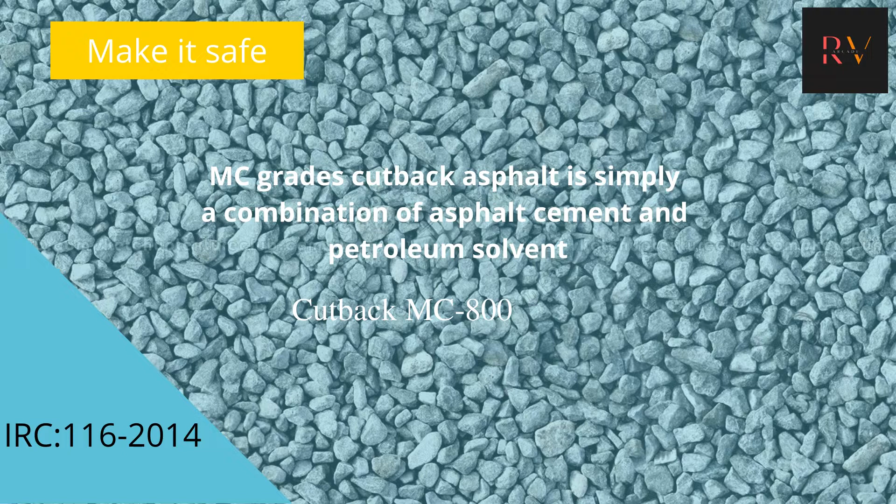MC grade cutback asphalt is simply a combination of asphalt cement and petroleum solvent. The material shall consist of plant mixed ready-made pothole patching bituminous mixture composed of mineral aggregate coated with bituminous material. The material shall be capable of being stocked for at least 6 months without stripping and shall be workable at all times. Unless specified otherwise, the mix shall be supplied in 50 kg plastic lined sturdy bags.

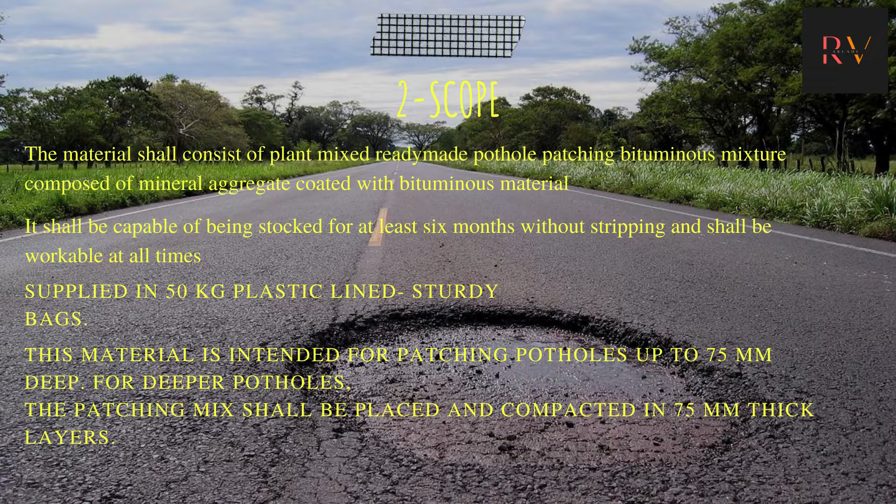This material is intended for patching potholes up to 75 mm deep. For deeper potholes, patching mix shall be placed and compacted in 75 mm thick layers. Details on the preparation of potholes, placing and compacting the mix in potholes are also given to ensure its effective use. The ready-made cold patching mix is suitable for patching potholes only and shall not be used for patching long stretches of damaged road surfaces.

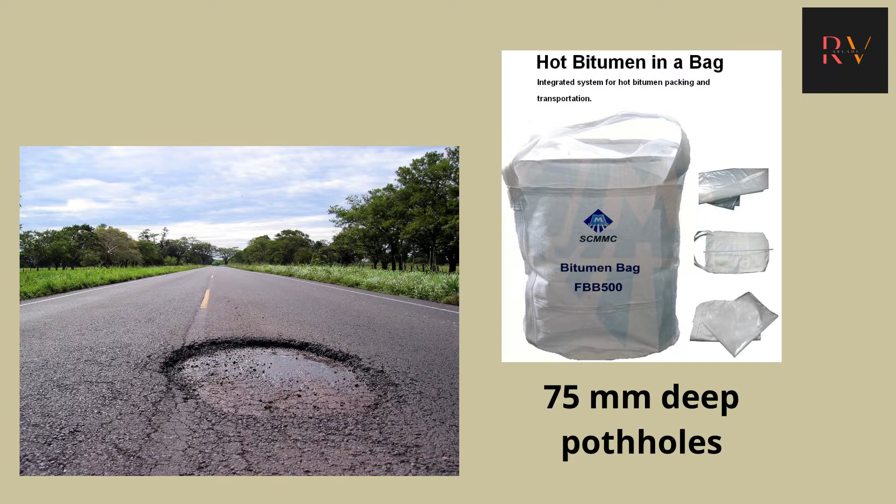As you can see, the ready mix bitumen is supplied in these sort of bags. The materials which we are going to use are bitumen, coarse aggregate, fine aggregate and composition mixture.

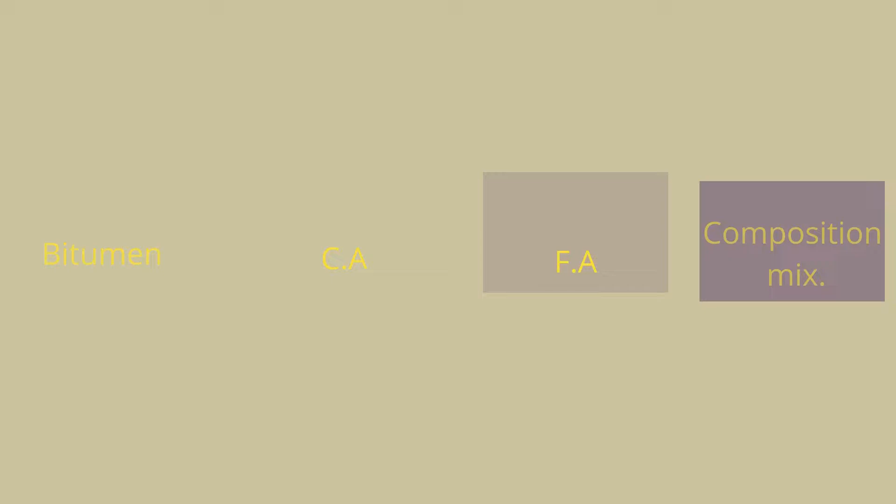Coming to the bitumen, medium curing cutback bitumen MC800 conforming to Indian standard specification IS 2171. Specifications for cutback bitumen shall be used in preparing the patching mix and shall be supplied by a certified manufacturer of this product. For proper mixing, the bitumen shall be heated as specified in section 4, which we're going to deal with in a while. MC cutback bitumen shall be treated with the proper type and amount of an anti-stripping agent.

This anti-stripping agent is approved by the bitumen supplier, so that when combined with the proposed job aggregate, the resulting mix shall pass the wet coating test, static immersion test, and water resistance test as given in Appendix 1. Moreover, the anti-stripping agent shall conform to IS 14982.

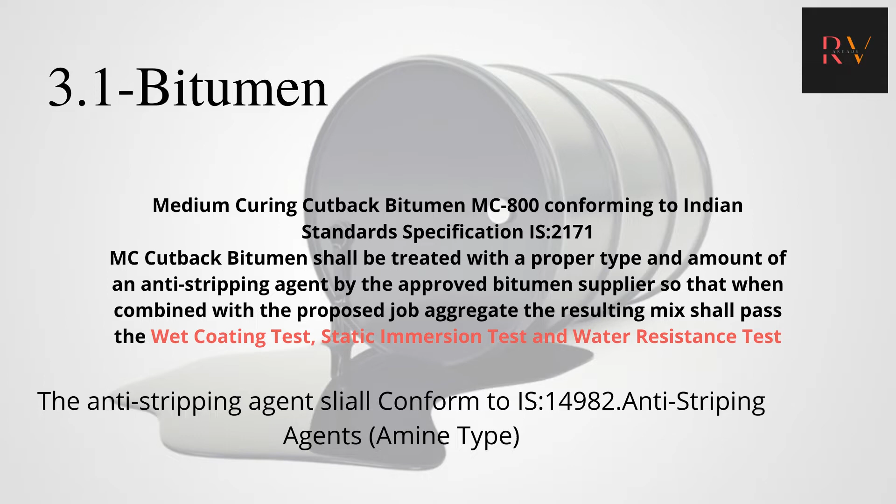Now on the contractor's part, the contractor shall furnish the sample of job aggregate each year to the bitumen supplier for these coating and stripping tests and obtain a certificate that the bitumen material has been treated to suit the job aggregate. This yearly certificate must be on file and shall be available at the asphalt mix plant when required by the engineer.

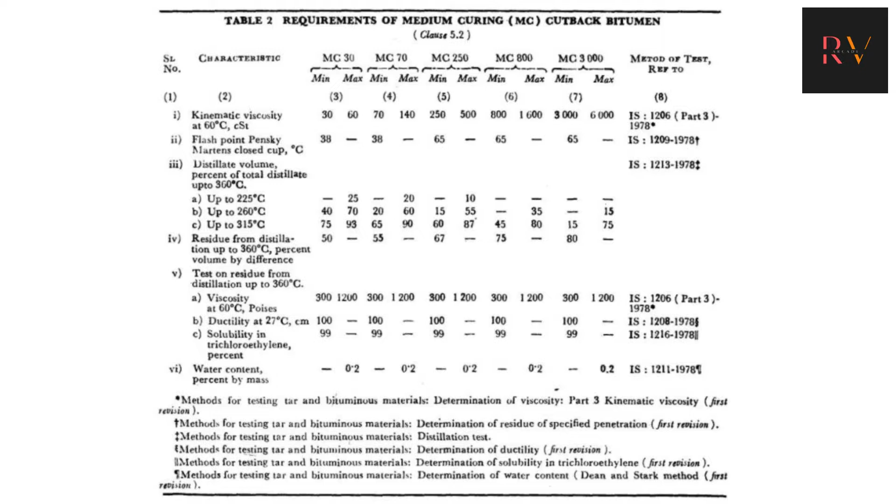Now this is table 2 from IS 2171, which is talking about the requirement of medium curing, which is MC cutback bitumen. It's going to talk about the characteristics, the grades, and method of testing and all.

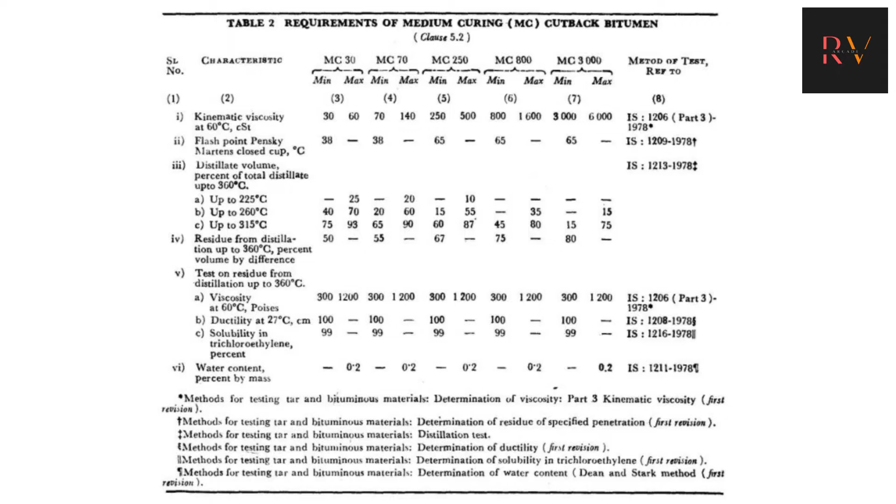Now coming to coarse aggregate. The coarse aggregates shall consist of crushed rock, crushed gravel, or other hard material retained on 2.36 mm sieve. It shall be cleaned, hard, durable and cubical in shape, free from dust and soft organic and other deleterious substances.

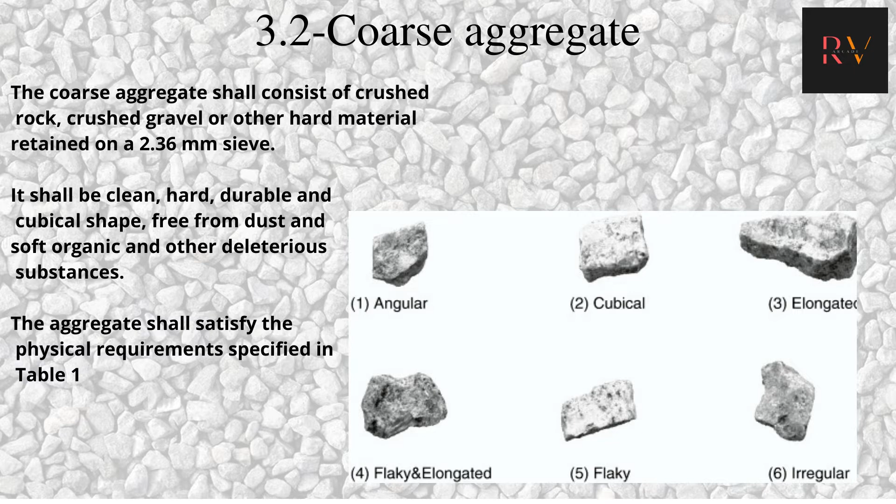The aggregate shall satisfy the physical requirements specified in table 1. These are the physical properties given in table 1, which is cleanliness, particle shape, strength, durability. You can see the maximum water absorption allowed is 2%. The coarse aggregate may satisfy either of the two strength tests, which is Los Angeles abrasion value and aggregate impact value. Either of the two can be used as the safety requirement parameter.

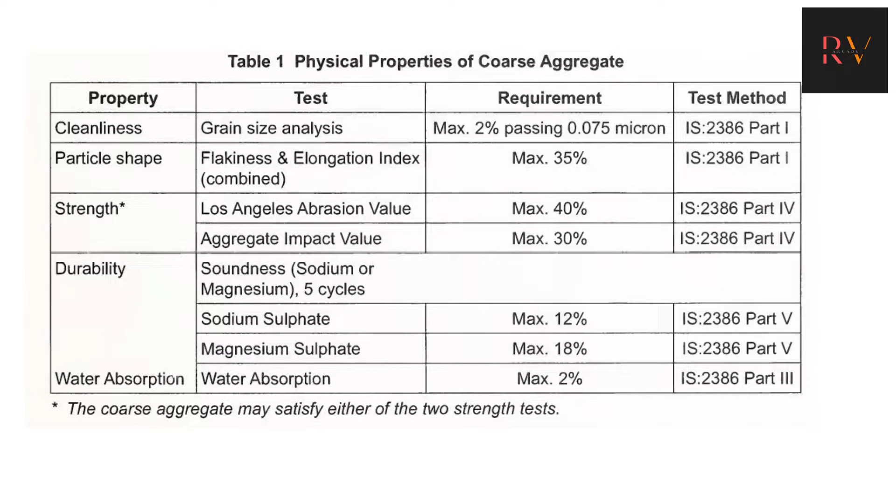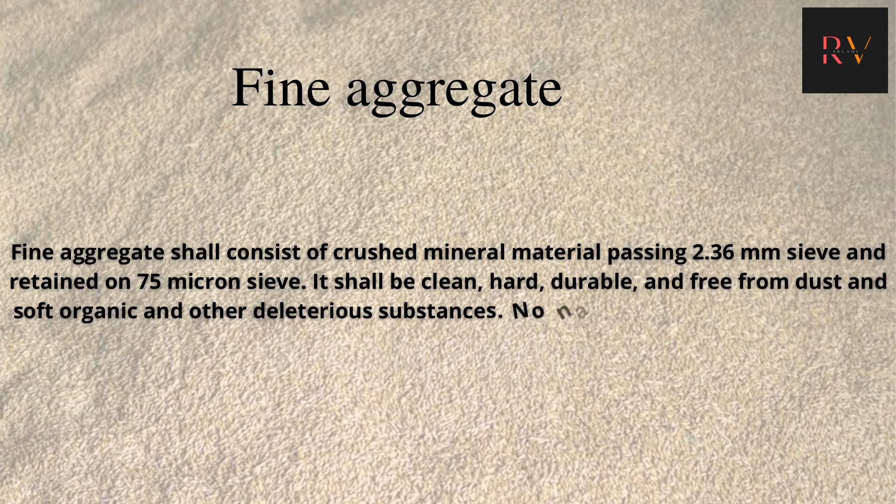Now coming to the fine aggregate. Fine aggregate shall consist of crushed mineral material passing 2.36 mm sieve and retained on 75 micron sieve. It shall be clean, hard, durable and free from dust and soft organic and other deleterious substances. No natural sand shall be permitted.

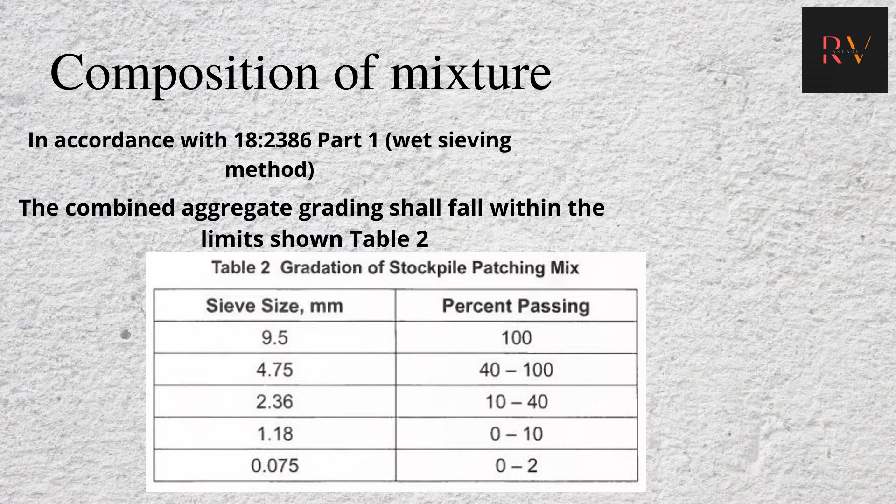Now, composition of mixture. The composition of mixture should be in accordance with IS 2386 part 1, which is the wet sieving method. The combined aggregate grading shall fall within the limits as shown in table 2. Again, water absorption of 1% or less than 1% should be used.

The amount of residual bitumen binder in the mix shall be as shown in table 3. You can see the minimum residual bitumen content for less than 1% is 4.5.

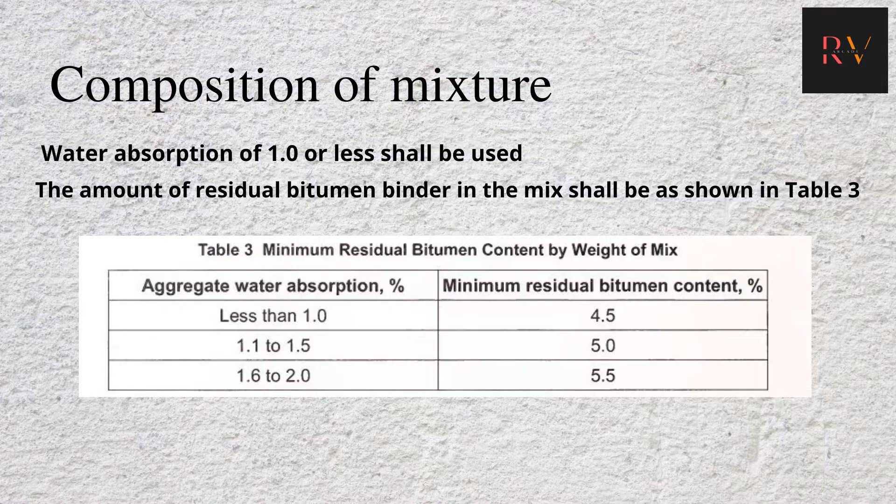Now coming to preparation and storage of mixture, which is an important part. So basically there are two types of asphalt plants.

One is asphalt batching plant, the other is asphalt drum plant, also called continuous type. Asphalt batch plants make hot mix asphalt in batches. The batch size is fixed from the control panel, and the plant keeps producing batches until the set production is achieved.

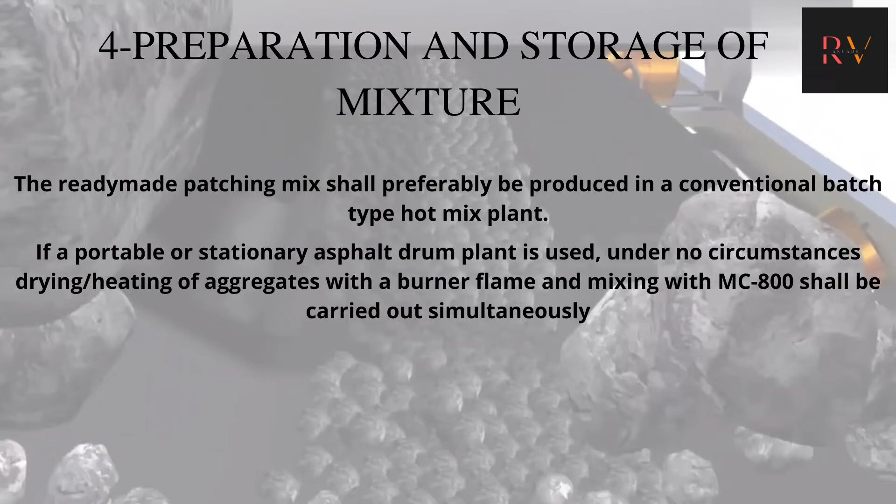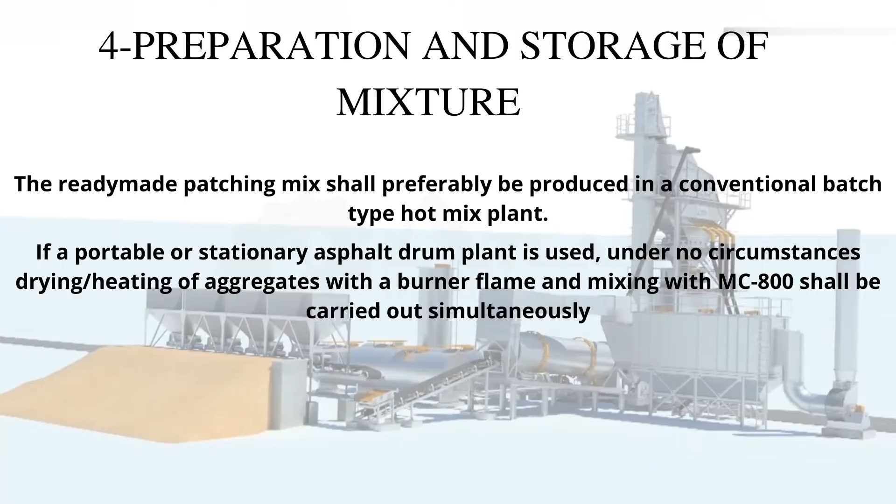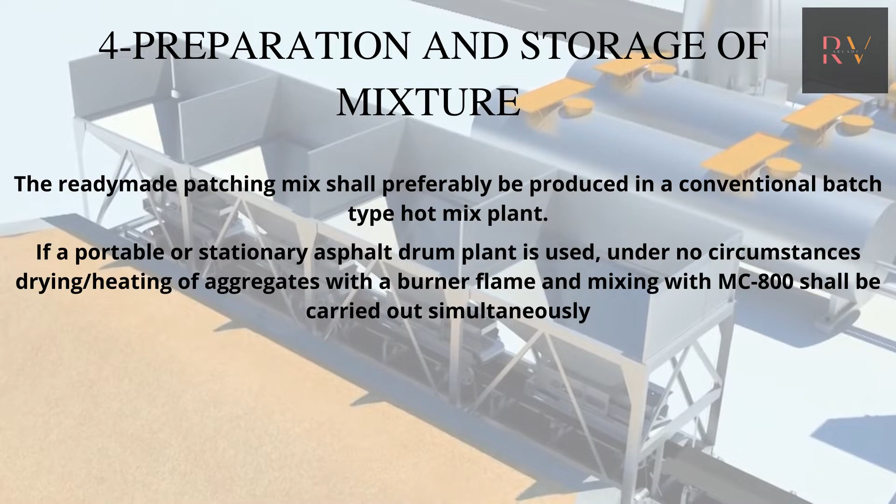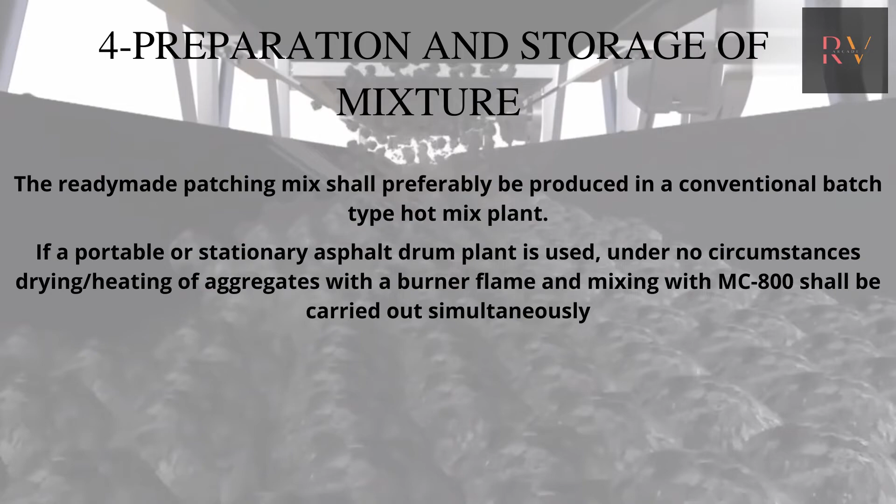High aggregate temperatures while mixing cutback bitumen will not only cause excessive loss of kerosene from the cutback, but will also pose a safety hazard in the plant. So under no circumstances shall there be any open flame in the vicinity of MC800 cutback, because it contains volatile kerosene. It is very important to deal with the aggregates away from the burner flame, especially when mixing with MC800.

The mix should be such that it can be stocked, handled, placed and finished without stripping the bitumen from the aggregate. To help prevent stripping and avoid heat buildup in a stockpile, which may burn the entire stockpile due to the chimney effect, the mixed material should not be stockpiled higher than 1.5 meters for the first 48 hours. The stockpile can then be raised in height and made into a conical shape.

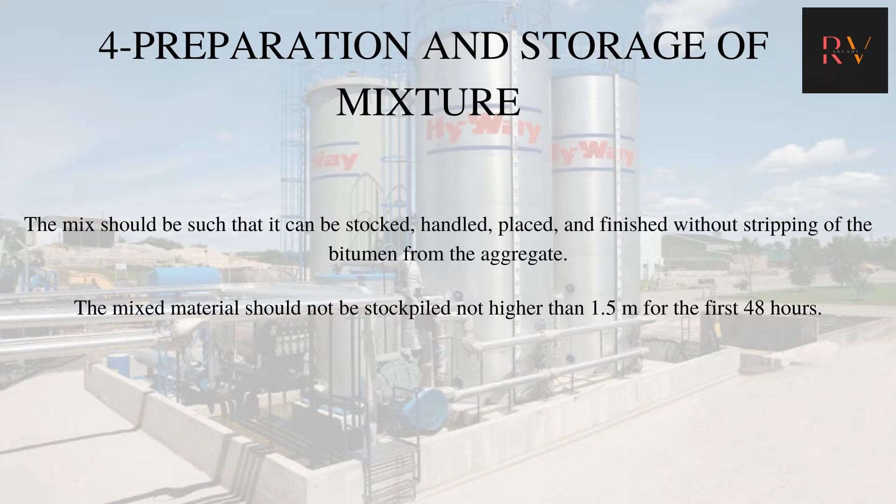Unless specified otherwise, the ready-made cold mix shall be placed and sealed in plastic-lined sturdy 50 kg bags on cooling. The mineral aggregate should be clean and surface dry before mixing.

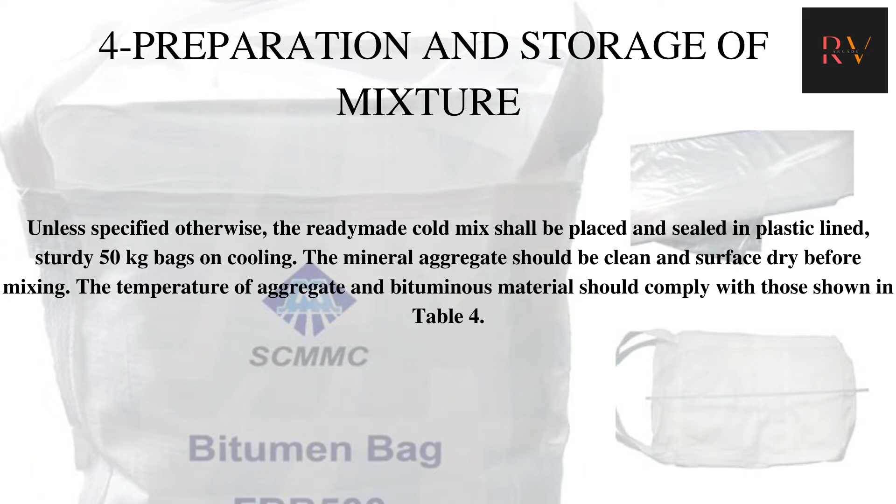The temperature of the aggregate and bituminous material should comply with those shown in Table 4. This is Table 4.

Though the basic role of an asphalt plant is to mix different grades of aggregate at elevated temperatures along with the bitumen and filler material to make hot mix asphalt, it is not as easy as it sounds. The entire process has to be in a controlled environment to get the desired result. Things can go wrong and turn out to be a serious matter, and the end result can be a big loss if not taken care of.

High aggregate temperatures while mixing with cutback bitumen will not only cause excessive loss of kerosene from the cutback, as already mentioned, but will also pose a safety hazard in the plant. So under no circumstances shall there be any open flame in the vicinity of MC800 cutback, because it contains volatile kerosene.

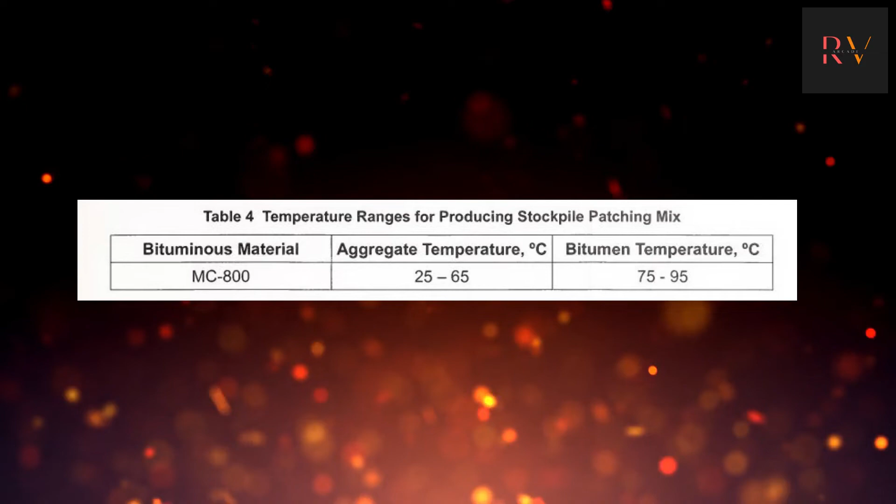Now preparing the potholes. Potholes shall be cleaned with a stiff wire brush, and all loose material including dust shall be removed with a soft brush. Potholes need not be dry; however, excess water shall be swept off from the potholes.

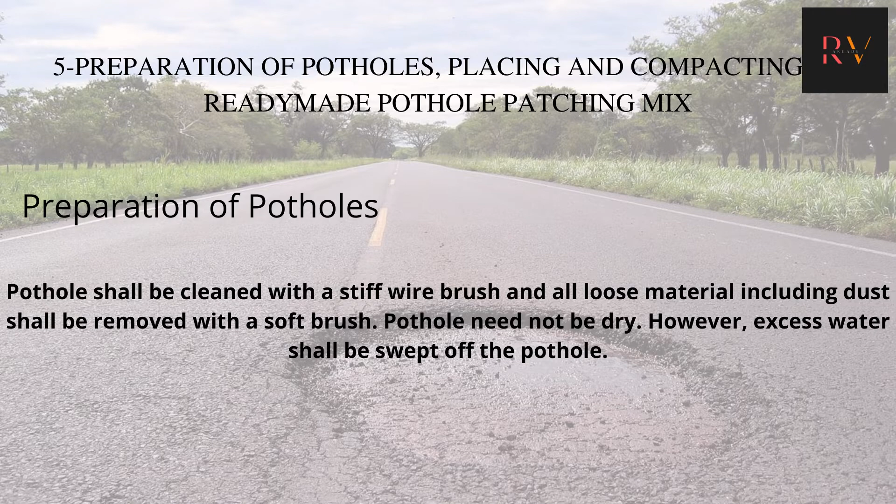Now, placing the mix in the potholes. This is intended for patching potholes up to 75 mm, approximately 3 inches, deep. For deeper potholes, the patching mix shall be placed and compacted in 75 mm thick layers. If the pothole is deep and extends to the granular base, it is recommended to apply a suitable tack coat or prime coat, whichever is feasible, before placing the patching mix.

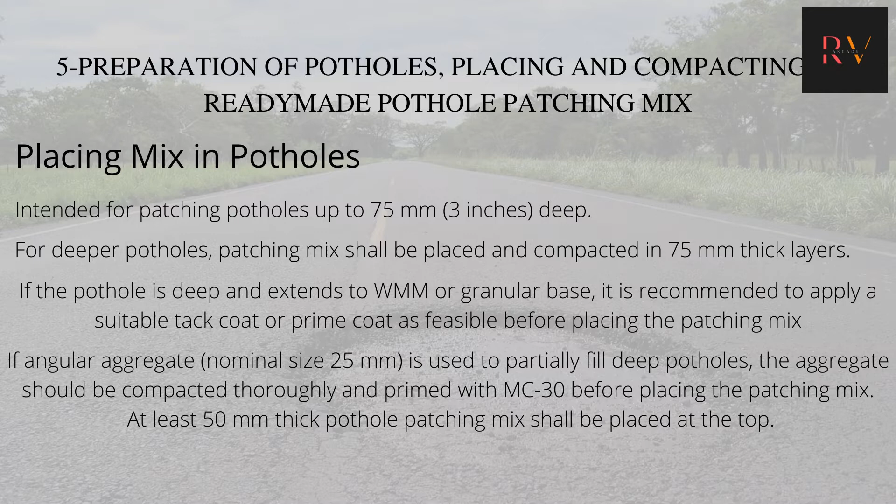If angular aggregate of approximately 25 mm nominal size is used to partially fill deep potholes, the aggregate should be compacted thoroughly and primed with MC30 before placing the patching mix. At least 50 mm thick patching mix shall then be placed on top.

Now coming to compacting the mix. First, the outside edge or periphery of the patch shall be compacted with a hand rammer or small compactor, and then compaction shall proceed inwards. To prevent initial pickup of the loose mix by the hand rammer, either wet the hand rammer with water or place empty plastic-lined bags on the loose mix.

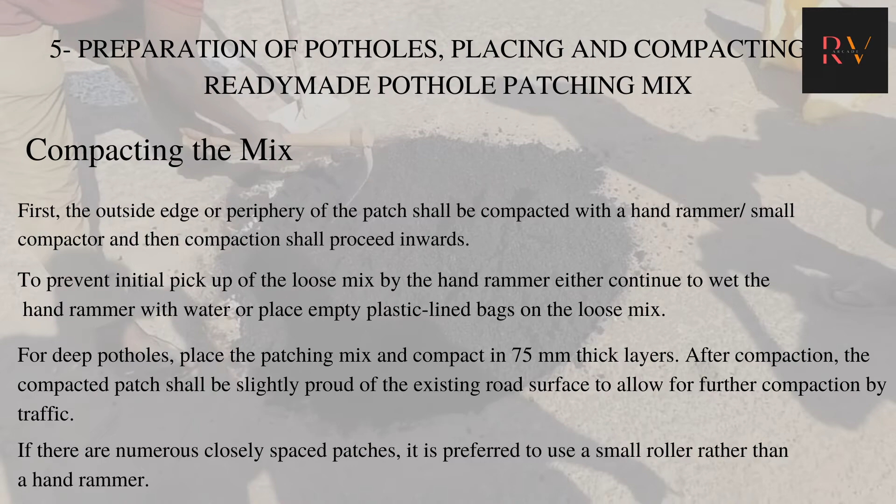For deep potholes, place the patching mix and compact in 75 mm thick layers. After compaction, the compacted patch shall be slightly proud of the existing road surface to allow further compaction of the patching mix by traffic. If there are numerous closely spaced patches, it is preferred to use a small roller rather than a hand rammer.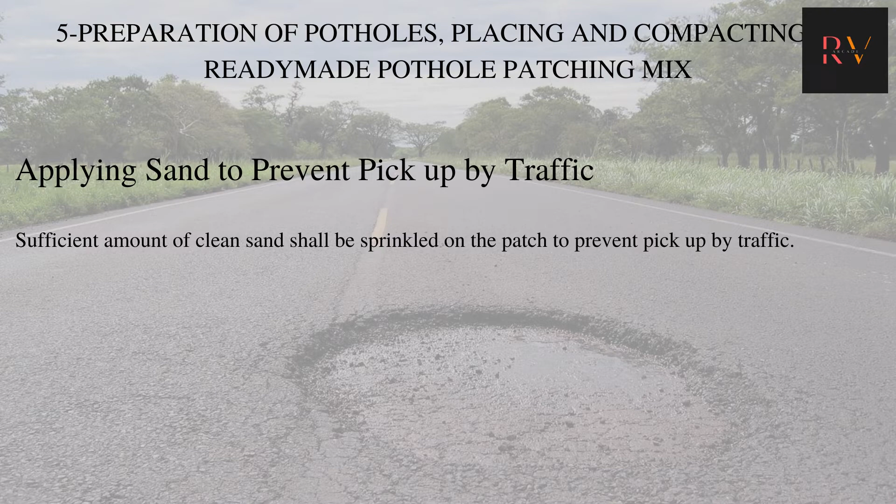Now, at the final stage, we apply sand to prevent pickup by traffic. A sufficient amount of clean sand shall be sprinkled on the patch to prevent pickup by traffic. Now coming to quality control, which is the most crucial aspect of the construction.

The composition of the produced mix shall be tested by an independent approved testing laboratory before acceptance by an engineer. Before conducting the bitumen extraction test to determine the residual bitumen content in the patching mix, the sample shall be cured completely to remove all kerosene.

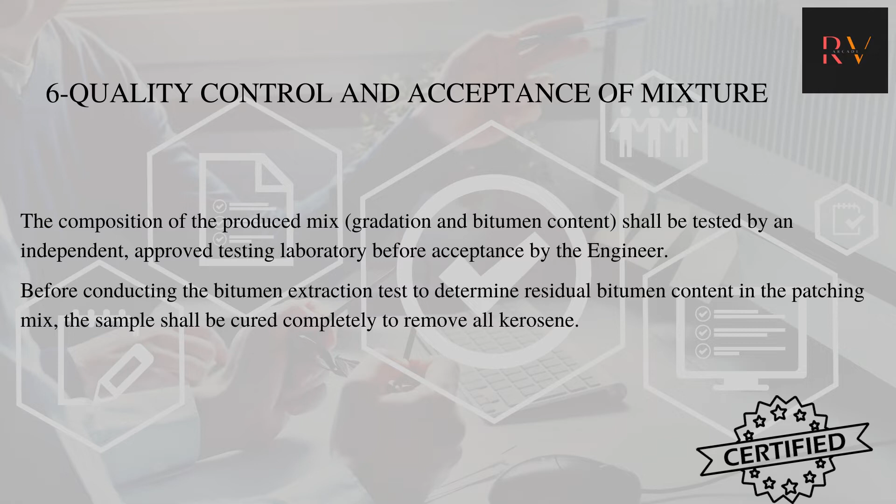Now curing. Before conducting the bitumen extraction test to determine the residual bitumen content in the patching mix, the sample shall be cured completely to remove the kerosene. Place the loose mix in an open metal container and heat slowly on a hot plate with frequent stirring until a constant weight is achieved.

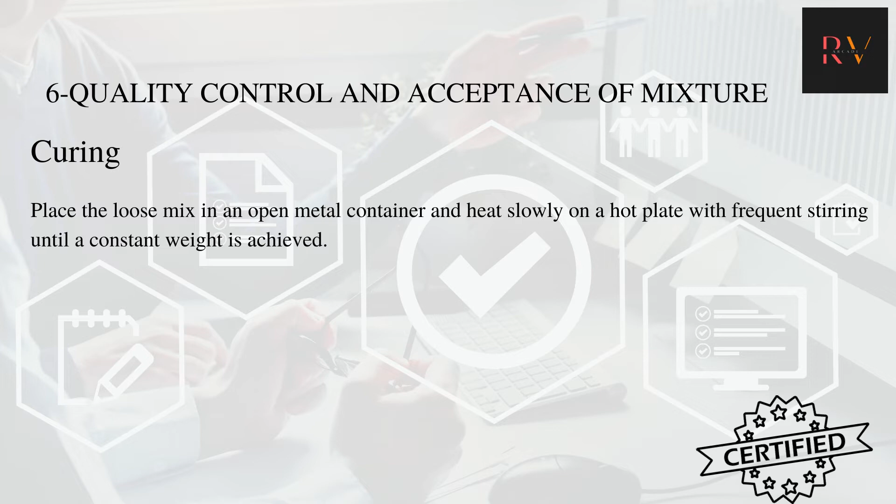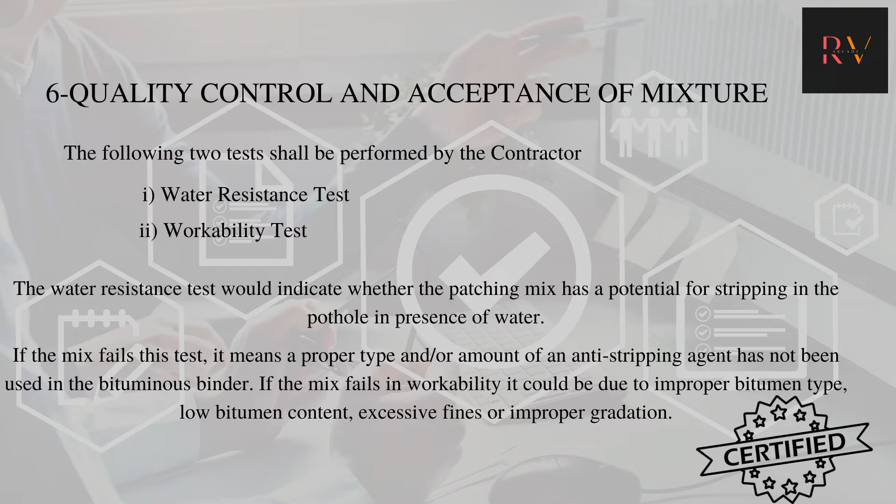The following two tests shall be performed by the contractor: the water resistance test and the workability test. The water resistance test would indicate whether the patching mix has a potential for stripping in potholes in the presence of water. If the mix fails this test, it means a proper type or amount of anti-stripping agent has not been used in the bituminous binder. If the mix fails in the workability test, it could be due to improper bitumen type, low bitumen content, or excessive fines or improper gradation. So I was talking about appendix 1.

Appendix 1 talks about 4 of these tests: wet coating test, static immersion test, water resistance test, and workability test.

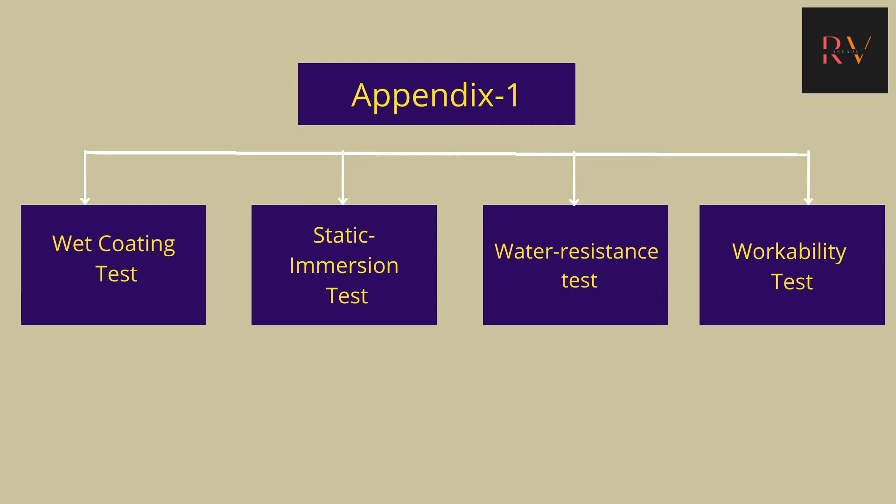As you can see, wet coating test. Heat the unwashed job aggregate, cutback bitumen, and distilled water to 40 degrees Celsius in a suitable oven. Weigh 100 gram of dry aggregate into a suitable mixing container. Add 3 ml of distilled water. Now mix this thoroughly with a spatula until the aggregate particles are uniformly wetted.

Add cutback bitumen equivalent to 5 plus or minus 0.2 gram of bitumen residue. Then mix this vigorously with the spatula until all aggregate is coated, but not more than 5 minutes. Now transfer this content into a 400 ml beaker containing 150 ml of distilled water, which should be around 22 to 32 degrees Celsius.

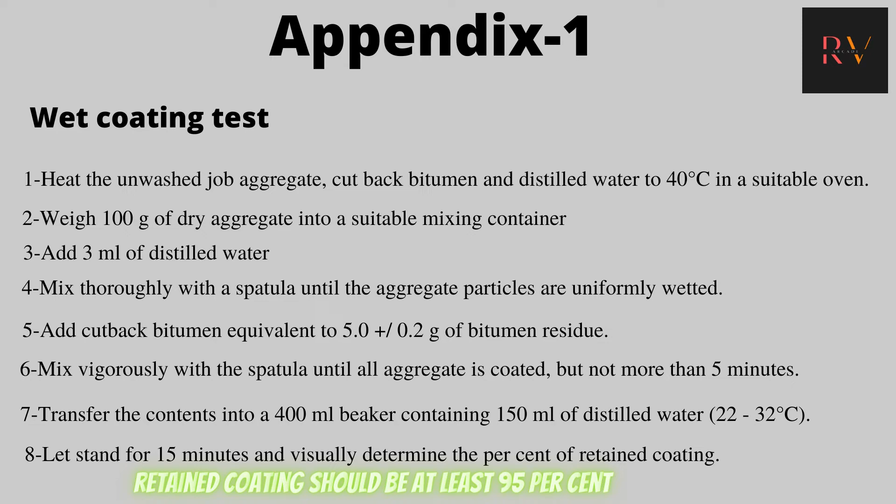Let it be there for 15 minutes and visually determine the percentage of the retained coating. The retained coating should be at least 95%.

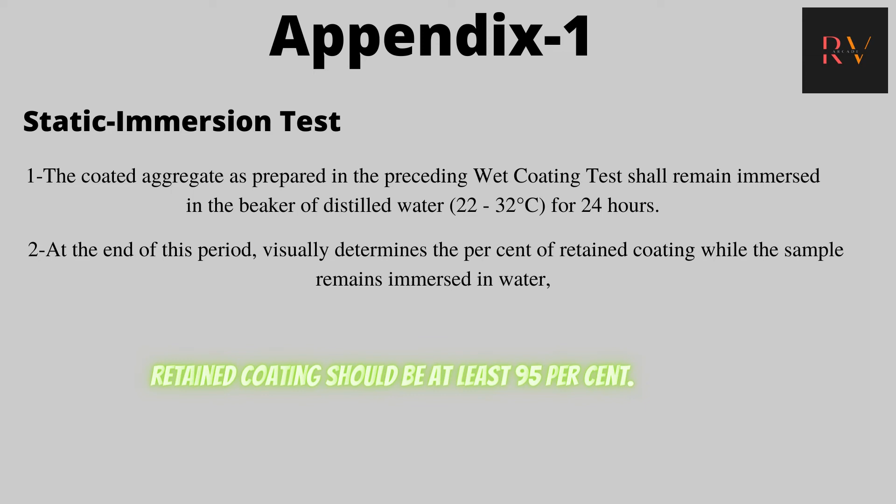Now coming to static immersion test. The coated aggregate, which we prepared in the previous experiment, shall remain immersed in a beaker of distilled water at 22 to 32 degrees Celsius for 24 hours. At the end of this period, visually determine the percent of retained coating while the sample remains immersed in water. In this, the retained coating should be at least 95%.

Now coming to water resistance test. 50 gram of patching mix, whether freshly prepared or taken from the stockpile or a sealed bag, shall be heated at 120 degrees Celsius in a laboratory oven for 1 hour. Cool it to 95 degrees Celsius in laboratory air and then place it in 400 ml of boiling water in a 600 ml glass beaker.

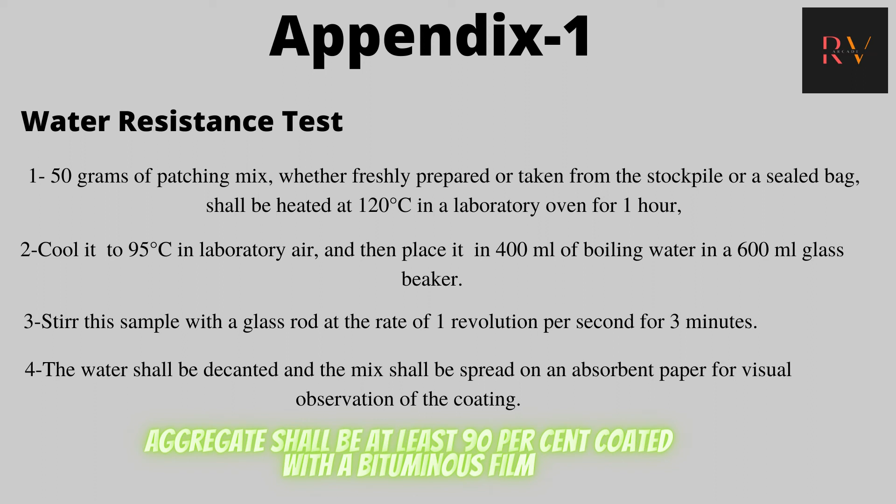Now stir this sample with a glass rod at the rate of 1 revolution per second for 3 minutes. The water shall be decanted and the mix shall be spread on an absorbent paper for visual observation of the coating. Aggregate shall be at least 90% coated with the bituminous film.

Now coming to the last test, which is workability test. Approximately 2.5 kg of the patching mix shall be cooled to around -7 degrees Celsius in a freezer. After cooling, the mixture shall be capable of being broken up readily with a spatula that has a blade length of approximately 200 mm.